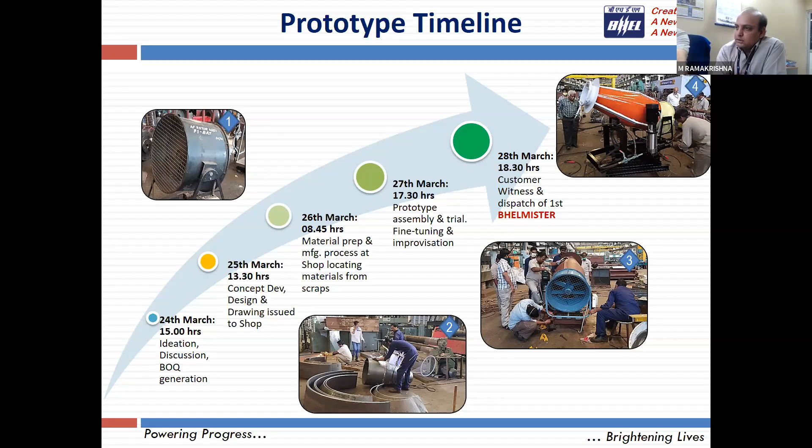This is regarding the principle and operation of the BHELMISTER. It consists of a major blower for blowing air, a pump, nozzles, and some piping and valves. Initially, the solution is prepared in one tank. From the tank, the solution is pumped through the pump and passed through the nozzles where the water gets atomized, and the atomized spray is blown into the air by the blower.

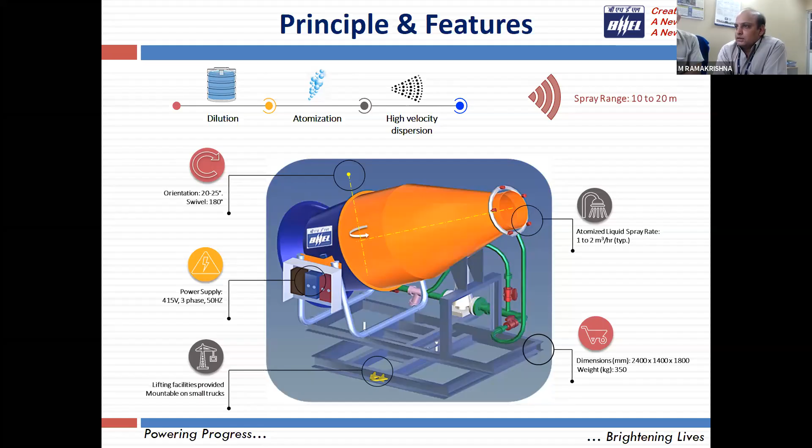These are the major equipment of the BHELMISTER, and the spray range it can cover is from 10 to 20 meters from the end of the BHELMISTER. The water flow rate is very minimal, around 1 to 2 cubic meters per hour. Other facilities required are one DG generator set and a water tank.

This is regarding the uniqueness of our BHELMISTER. BHEL manufactures all equipment related to power plants, so this is an exception, and we are having a different product for a particular purpose. Second, we executed this in the shortest possible time, within 4 days. And third, the material was available.

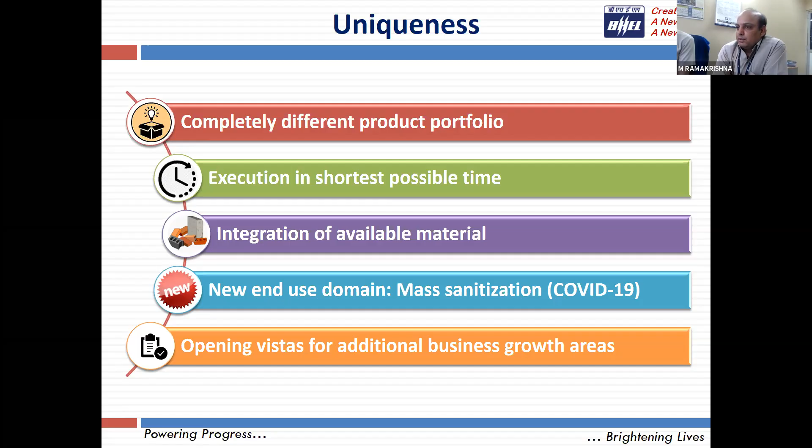Since it was a lockdown situation, we were unable to get the materials. We had to locate the materials within the shop itself, and with the existing materials, we developed the prototype. This was the unique domain of mass sanitation for COVID-19, and it also opened different vistas for additional business growth areas.

So these are the challenges we faced: the time span was very less, as you can see. The requirement was very immediate, and there was a shortage of material availability because all the shop outlets were closed. We were unable to get materials, and were forced to get materials within the factory itself. And the third thing is manpower - hardly any manpower, because only 10% of the staff were working due to the lockdown.

Through this BHELMISTER, we have demonstrated the core values of the company: that is governance, excellence, and loyalty, innovation, commitment, and teamwork.

After supply of the BHELMISTER, we are having 24/7 customer support. As and when any problem they face, we troubleshoot the problems within the next few minutes or hours over phone calls. We get calls even at midnight, and we are able to solve the problems. Till now we have supplied more than 120 Bellmisters all over the country.

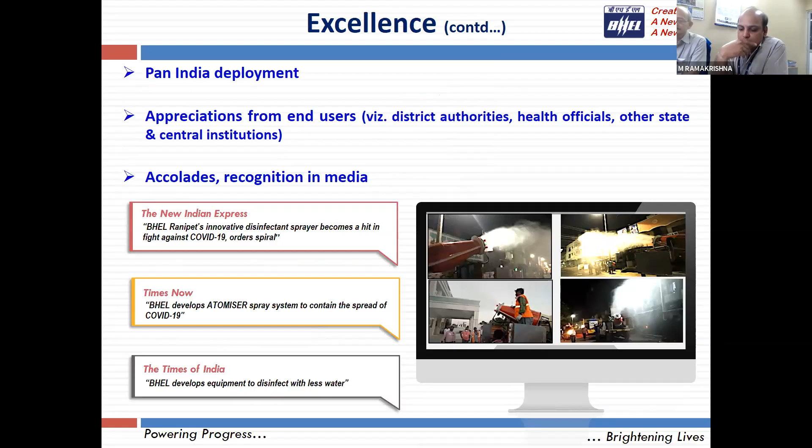The equipment we supplied to Vizag municipality was used for the styrene gas leakage, to suppress the effect of the styrene gas leakage. So it was used for different purposes also - even for sanitation of Udyog Bhavan and the MHI office. And also at our power plant sites, they were using the equipment for dust suppression.

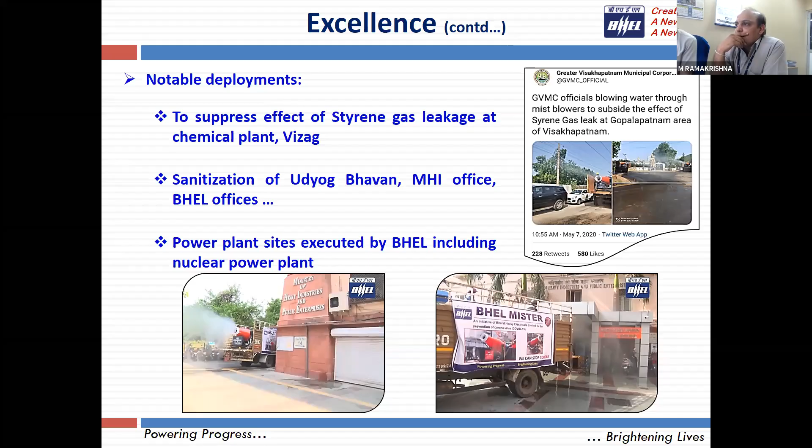We also have a plan to supply this BHELMAJOR, which will be used for a dust suppression system in coal mines, construction sites, and other power plants also.

So these are the champions listed.

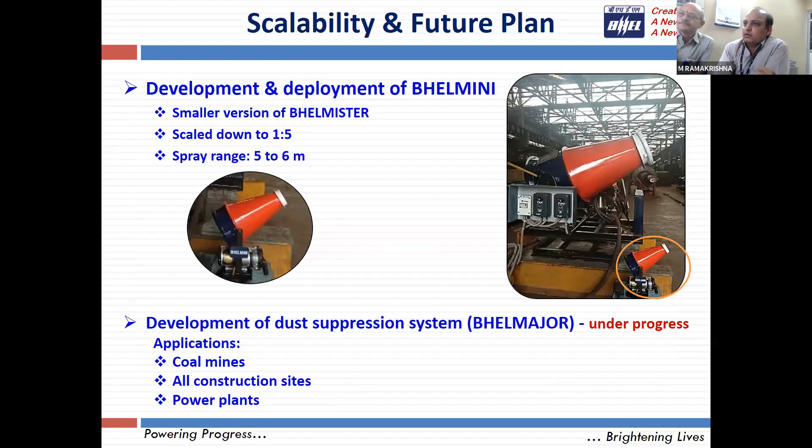This is a very useful device you have designed and put into application. Now it is of two types: one is the smaller one at 5 meters odd, and the other one is up to 20 meters. Are you planning to have a larger coverage with a more vigorous device?

Yes. And also, has the efficacy of this machine and the spray etc. been tested? Absolutely sir, you're right. In fact, before we deployed it to the external agency, we tested the first prototype itself in our shop, and measured it to go about 12 meters. In fact we have been a little modest - the distance it went was about 15 meters. But for contractual obligations and other aspects, we have given a guarantee limit up to 12 meters, sir.

My question was, does it have any side effect on the people working, or coming under its coverage? Sir, this is basically to be deployed when the people are not present in the area of sanitization. Generally the advice we have given to the operators is that they have to see that the mister operates in the direction of the wind - that is, the wind blows and favors the mist to be deployed towards the lee side, we will say.